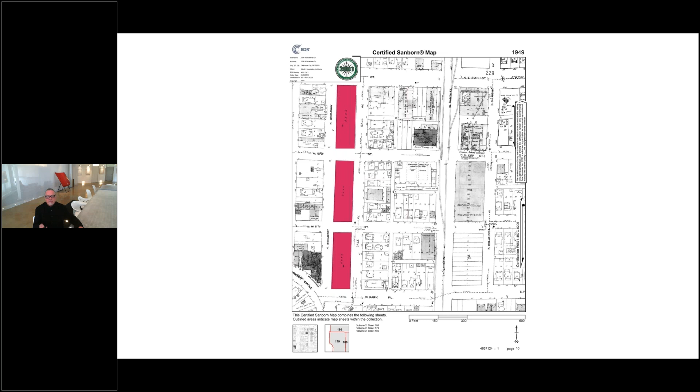One of the things that's important about this context is what goes on around it. There's a railroad on the east side, a streetcar on the west, and then this little misfire from a survey point of view.

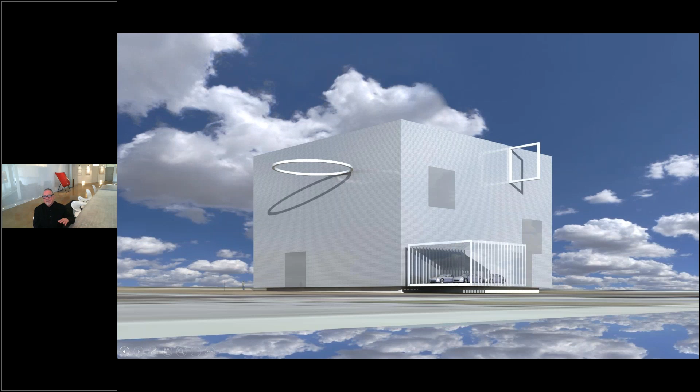In this particular instance, we're contemplating a glossy or glazed brick, white brick, that would be very simple and straightforward, and then artistic shapes that would then, in essence, cast its own shadow and therefore be moving or a building in motion and changing, which will be important as we go through the process. But you can see that it has a curiosity about it.

Same thing here, how the windows might be placed. And then trying to get less and less. Can you get less and less and more impact by the shapes, the shadows, and those kinds of things that really make you understand what goes on in this building?

Just to kind of give you a little bit of an idea of the kinds of work that we do and the things that we're thinking about, it has to do with place. How do you place this building in a particular location?

Well, the two elements on the upper right-hand corner casting its shadow illustrate the fact that the address of this building is at 11 Northeast 11th. And it was a way to artistically interpret that address. To the right was an outdoor space floating above a porte-cochere.

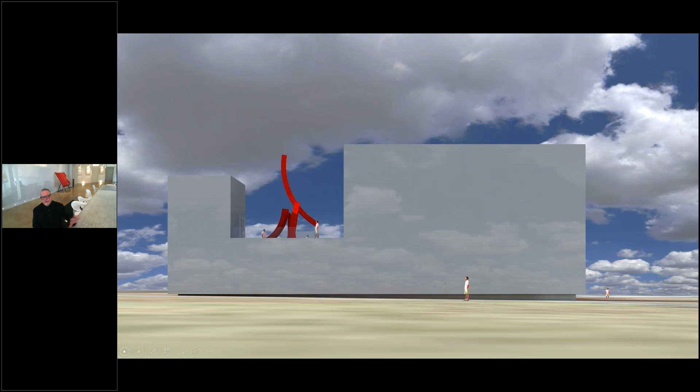Then we did versions comparing or completing an addition at the outset of the building, which would include not a second building, which we ended up doing, but an extension of the main building. The main building block is the large one to the right. The small one to the left is actually where the makerspace began at the earliest phases.

We looked at stacking the program, again, this outdoor deck. We particularly like the lady floating in the middle of the photograph. That was, of course, planned. And then you see coming around to see another form being created as a result of program.

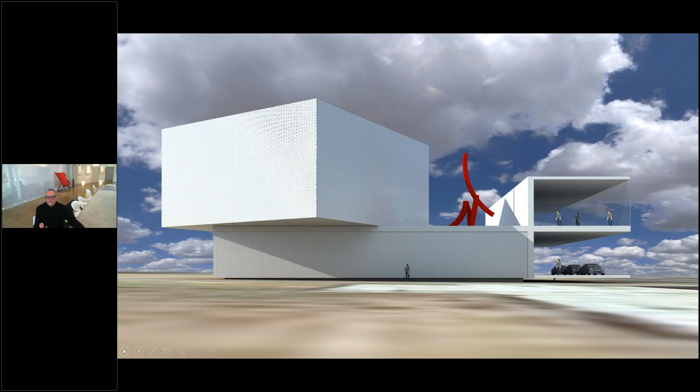And then we began to look at the fact that, well, what if we can't afford the idea of a multi-story building? What if it has to be flat? We had 4.8 acres. We could do a flat building, and so we began to illustrate that as well. Certainly there would be a cost benefit to this.

This is basically a big plinth floating above the ground, just like the two people are there on this photo, which I'm just noticing for the first time, and I'm just appalled and embarrassed.

This gives you a sense of the view that the people in the community would see as they approach the building. Parking would be on the right. We live in a place where parking is very important in this part of the world.

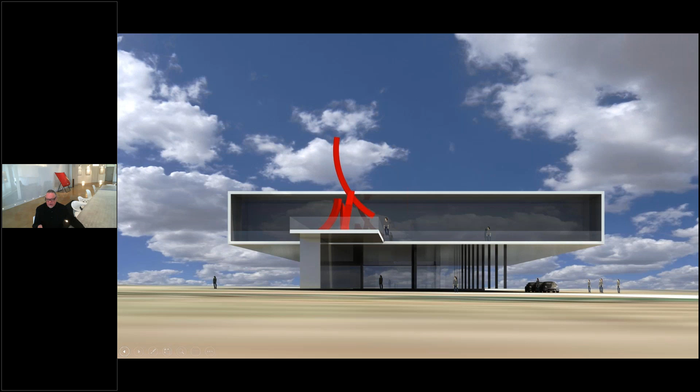This was intended to be the floating building because we had the opportunity and desire to have children protected from the hot sun and wind. By raising the building off the ground, it seemed to make lots of sense. It also provided protected space for exhibitions to be shown in all types of weather.

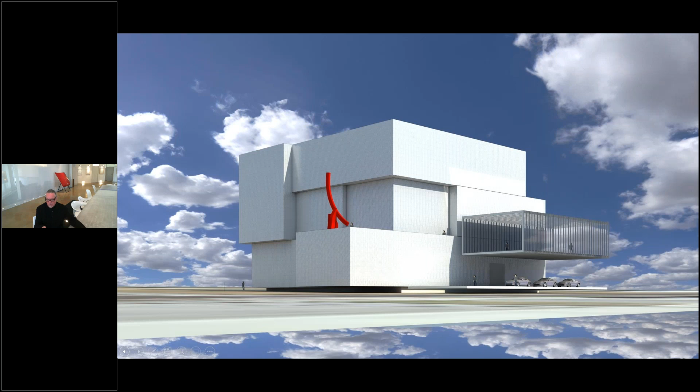Simple, again, another simple exercise in volumetric forms, stacking together and creating indoor and outdoor spaces functioning together. Again, you see the volumetric developments. On the right, you see this notion about a protected outdoor space and a porte-cochere that's a result of it.

So it began to continue on to this notion of site concepts, and I'm going to start by telling you that I've been working in sketchbooks virtually all of my life. I've just finished my 50th, number 50, and I've started my 51st sketchbook. They're 210 pages each. It takes anywhere from 60 days to 12 months to complete it, depending on projects we have and how inspired I feel at the particular time.

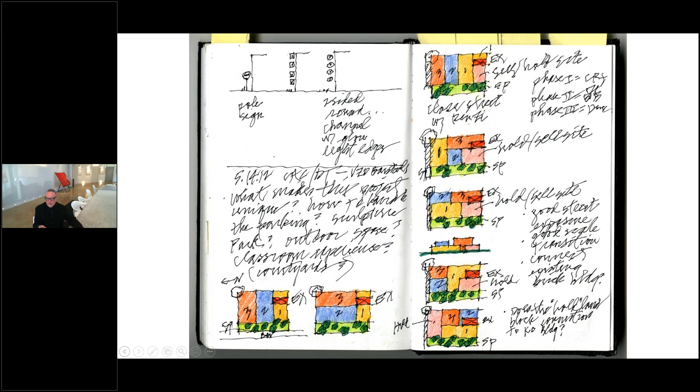So this is an exercise of going through trying to do site-related experimentation about where functions go, how the 1, 2, and 3, which are the functions of how the building might be added onto over a period of time. On the right-hand side, for some reason, I either ran out of paper or did something, and I used a napkin.

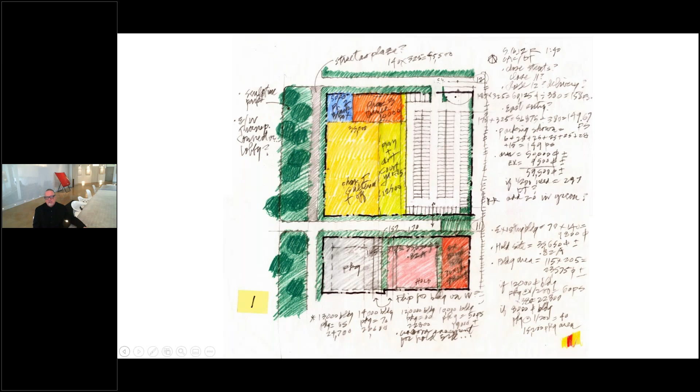And then that group of very rough drawings—I will tell you that all of my drawings in my sketchbook, I basically call my ugly drawings. And people say, well, why aren't they beautiful? And I say, because I don't do beautiful drawings. These are really drawings that identify possibilities and opportunities and design things. You'll notice there's 50% words and 50% images, if you will. So this was number 1 out of 16 site studies that I did in an effort to try to determine what the best solution was.

I ended up on number 16, and you'll notice down at the bottom, the yellow blocks surround a courtyard. This was an early possibility on how we would protect children being within this courtyard from disappearing or wandering off from the institution, and it was one very important step going forward.

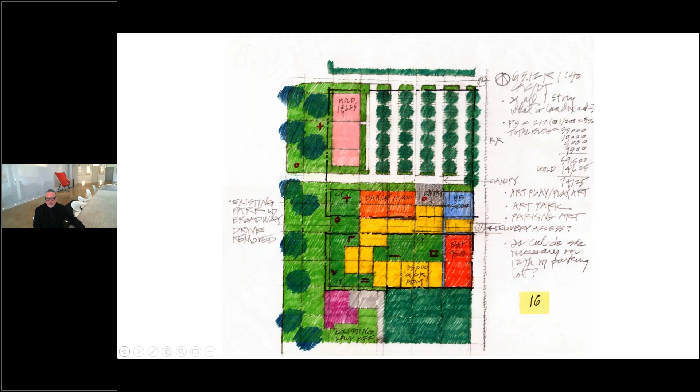Again, I said earlier that we live in the land of cars in Oklahoma City. Oklahoma City is 620 square miles. Every place is 30 minutes away, and so that's just a part of our lifestyle.

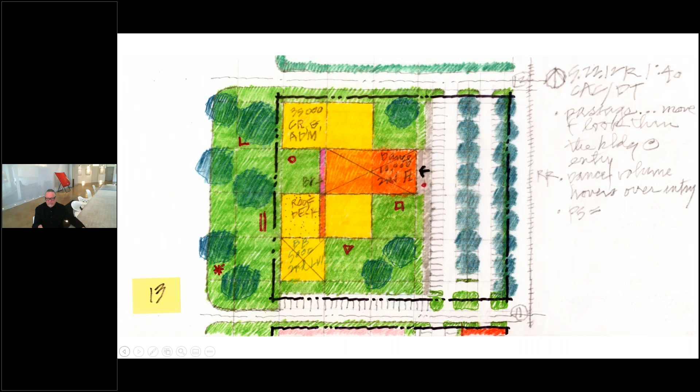You can see that I did a second round of 13 variations on the site concepts. Ended up isolating the building itself. The parking ends up being on the east, which is the right. The railroad track, and the track you saw earlier with the big railroad, the big diesel train, is that view. On the left, I have actually taken out the road that separates Oklahoma Contemporary from the park. You'll see it come back in a moment, but this was really focusing on that.

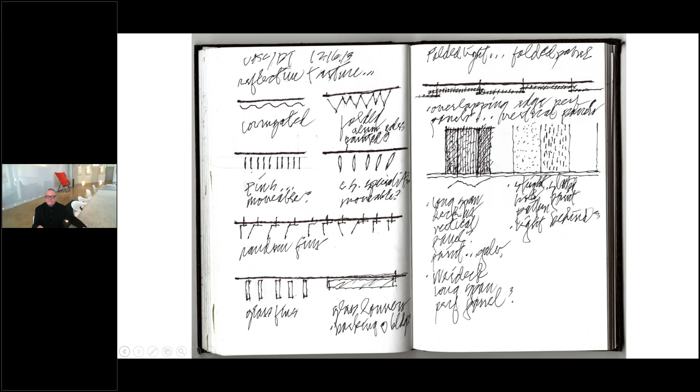And then I continued on with this notion of what would it be like and how would you construct this? How would you put it together? How would you make these panels and literally attach them to the exterior building?

We have a wonderful stair called the ceremonial stair that you'll see in a moment. I felt like this really needed to be an experience, and so we took a fire stair and converted it to an accessible stair using special fire doors that automatically close when there's a fire, but during the daytime they're open all the time. And so the stair becomes this place for artwork.

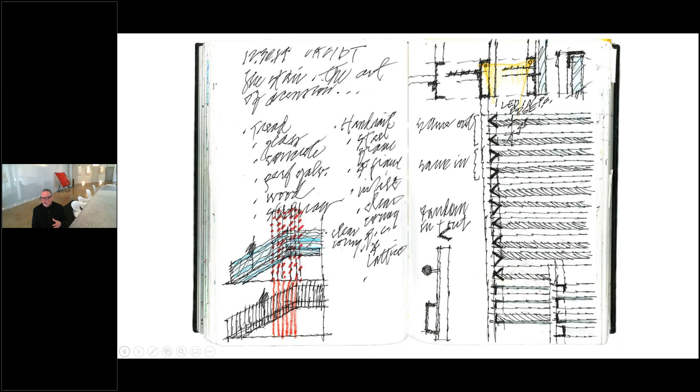There's going to be opera created and sung in the stair that you'll see in just a moment. It was also important that it was a place where great conversation might go on between artists, students, or anybody there to see something new.

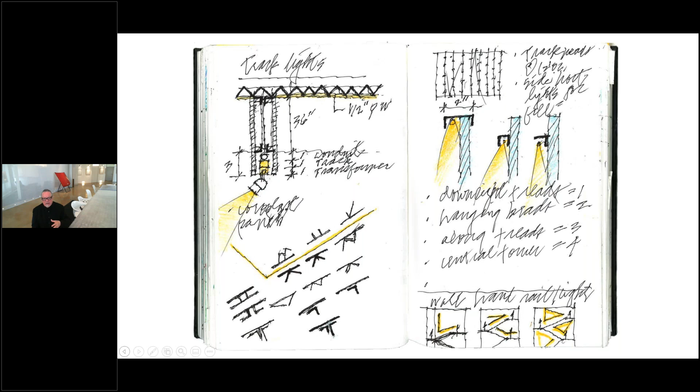So you're continuing to see this development. The upper right-hand says, how do you fold light? I'm really trying to ask myself these questions as the skin continues to develop. Everything from the lights on the stair on the right are made from folded channels. The folded elements on the left in the lower part are about how a column might be enclosed using folded metal panels.

And then finally you get to basically 2014. This was the first real appreciation for the folded form of the building, literally going all the way around and creating this folded form, ultimately folding light.

On the left-hand side, the element sticking out ends up being the lantern that you'll see, classrooms on the left, the entrance on the right, the blue rectangle is the elevator, the loading dock and so forth on the north side. The north side is where we end up with the elevated deck that overlooks the great lawn you'll see in just a moment.

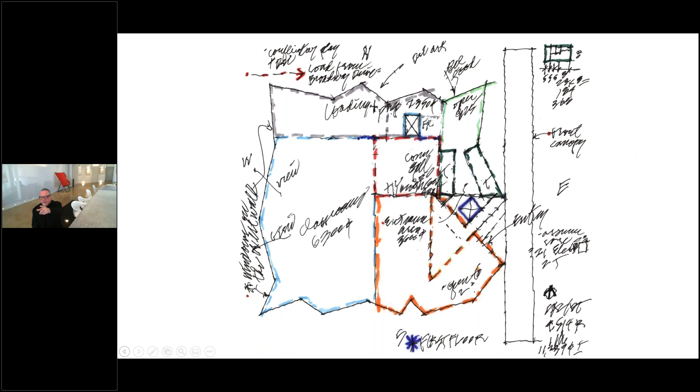One interesting thing on the right-hand side, it says entry, and there's an E over there, which means east. That linear element was really the front canopy, and the canopy moved completely as the project evolved.

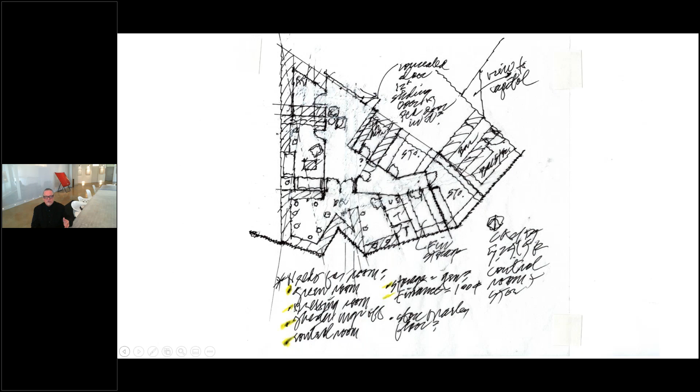So we then take that next step, which is to make spaces, usable spaces, with simple sketches. This is the green room areas. It includes toilets, offices, storage areas, and so forth, and it is continuing to become, we're really starting to become a building.

The Architectural Committee, which I am deeply indebted to over a period of time, included this group: myself, James Pickle, Chris Casillas in the middle, he is our chairman, and the director at the time, Liz Eichmann. Anyway, all of this group are really a part of making this building come together.

We built 3 full-size mock-ups on a space next to our building in downtown Oklahoma City. The left one ends up being a corrugated shingle made in Nebraska. The center one is folding light that was chosen, that's why we're all standing in front of it. The right one is a variation of that, but done in white. This one was chosen on this day and agreed to go forward.

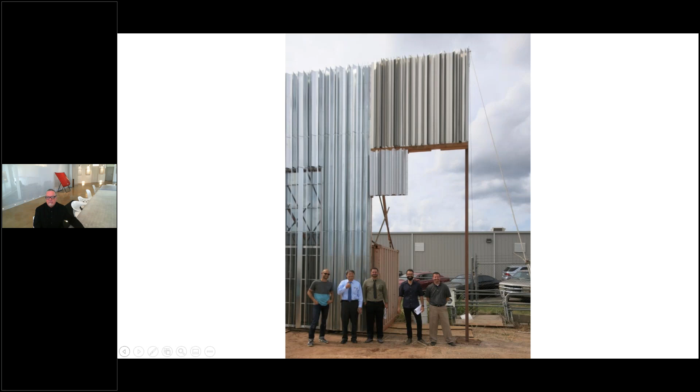What also happened is that we went to the contractor's yard, Matt Thomas. The fellow in the blue shirt, that's Bill Yen from my office, but the right-hand fellow is Josh Livingston, and Josh and his company were responsible for fabricating the fins for us, a very important moment in the history of the building.

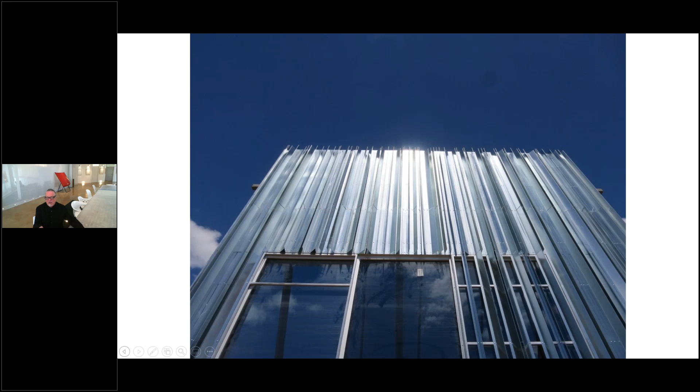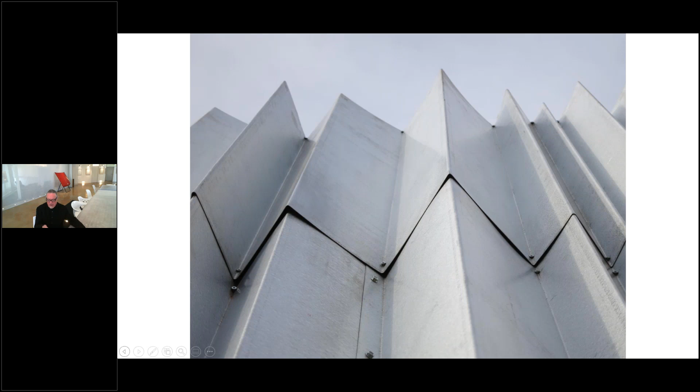As you can see, it started out having corrugated metal and screw-attached elements, and we got smarter as we went through this, finally ending up doing it as an extruded aluminum fin that you'll see in a moment. This was a mock-up, kind of reminds me of my dad's farm equipment, but anyway, it was a very important start for us going forward.

So I'd like to jump into construction at this particular moment and show what began to happen at this time.

For 20 years I have been photographing gloves. I first saw construction gloves falling on the ground, or falling on the floor inside a building under construction, and I was fascinated by it because architecture wouldn't exist without construction people and craftsmen, people who can do things a whole lot better than I can. These became fascinating to me, and I've done about 5,000 photographs of gloves done by workmen, my homage to their work itself.

So this really starts the construction process. This is the site as we begin to do excavation work. The job site sign is on the right.

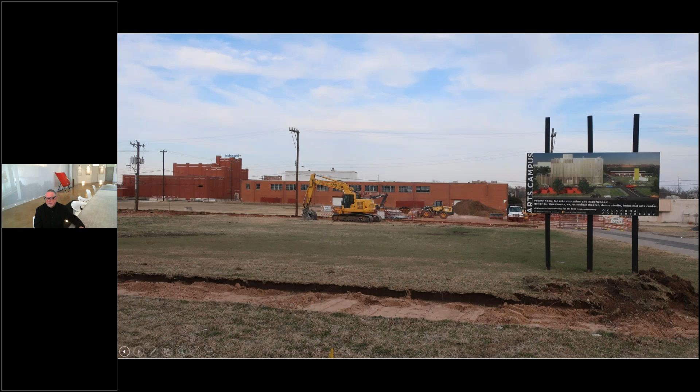We continue on. This is not my burial ground, I will promise you that. This is actually a location for the box that would go in the ground, containing the important drawings and history, a time capsule if you will, that will be opened up in 100 years, and I'll be there for that. So if you're wanting to come to Oklahoma City, I look forward to seeing you then.

Oklahoma is also known for the bombing in 1995. It's known for the Dust Bowl. It's known for the oil and gas industry being a seesaw. It is known for lots of things. Some of them are really good, some of them are not so good.

We wanted to find a way to commemorate or say something about Oklahoma City that was really powerful and very positive, so we are celebrating the quality of the light and the color of the skies in Oklahoma. This building is inspired by that very thing. Walking around on the site one day, as you can see, it's under construction.

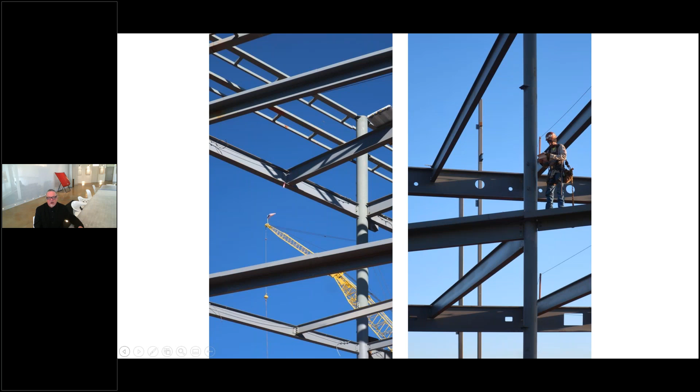The steel obviously starts to go up. I'm really proud of Bill Yin for spotting and creating all of these locations you see perforated in these giant wide flanges that allow devices like fire protection and so forth to go through without doing an up and down around the beams.

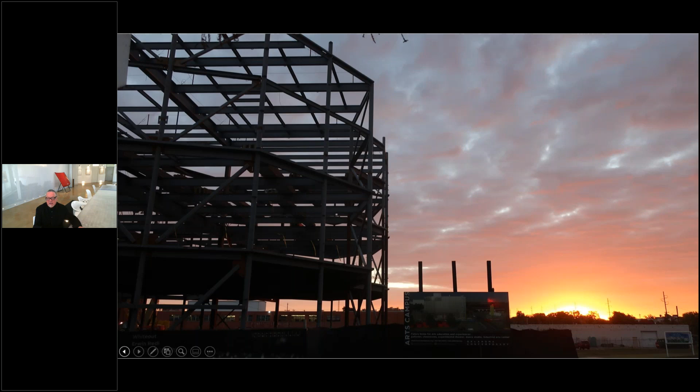This again captures the notion of the east, or the sunrise coming up. The sun is just below, just beyond where the sign on the building is, to the east. But again, it's sort of a moment to imagine what would ultimately be coming.

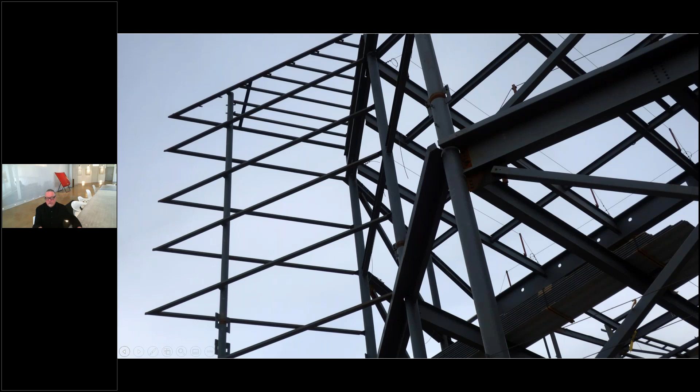Wonderful steel work. I love working with iron workers and watching them do lots of things that I can't do. At the topping out ceremony, it was a gray day, very windy, like most days are, and they were able to tie the tree to the top so it wouldn't blow off.

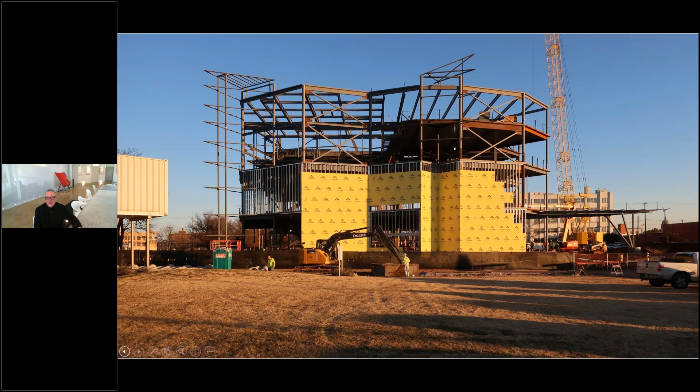The building continued, obviously under construction, with Dens Glass. This is a 12-inch thick wall because we wanted something very energy efficient and sustainable, so we've got lots of air in there, and insulation certainly. It gave us an opportunity to do a very, very responsible building along the way.

This is our first two large sections of mock-up to go up on the building, of the fins themselves. On the left was the first set, on the right is the second set, and the short version is the handrail, which you'll see in a moment.

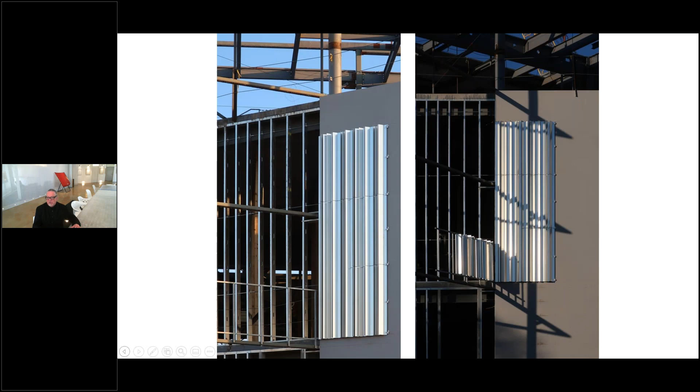What also captured my attention here was the whole idea of, in essence, the lantern casting its shadow over the random fins, and what an incredible shadow it created, and how the light, dark, shade, shadow, and reflection all began to happen at one time.

As it went further, it became clearer and clearer. In fact, I was so happy that one of the fellows putting up the aluminum came to me one day with this incredible look on his face, great joy, and he said, 'Gosh, Rand, it's working.' I stopped for a moment and thought, thank goodness it's working. I would have been run out of town if it wasn't, but it really did work, and you're going to see the results of that in a moment.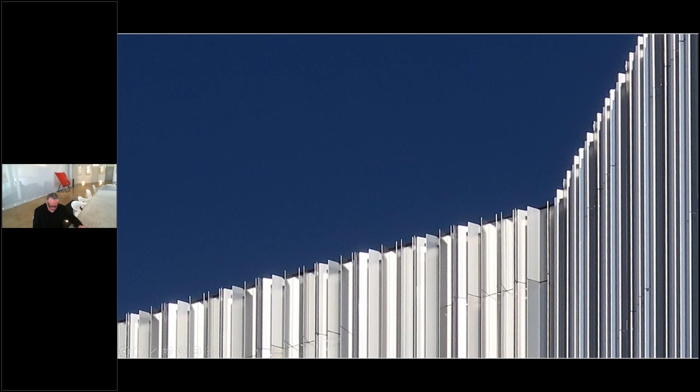At the very top of the roof edge, I'm sorry this slide is a little soft, we took the fins all the way up. We did not cover it with cap flashing because we wanted this notion to be a building that was continuing, or reaching for the sky along the way.

The lights start to go into the lantern. The lantern is a recognition for a very important donor along the way, as you see this, you're looking to the east.

What's particularly important, not only in its poetic name, Folding Light, but the whole idea that there is something driving this building. The whole idea was that the building needed to do three things. It needed to embrace its place. It's something I believe in philosophically. It's my home, and it's a very important thing. So embrace the idea of place.

This is Oklahoma. How can we put this building in this place? This building, I can tell you, could not belong anywhere else. It belongs in Oklahoma City.

Its purpose was to be an arts education facility. Its intention is to teach children and adults about the arts and how important they can be in their impact on all of us as we go through life, and those things we acquire, understand and appreciate that are beautiful along the way. The poetics is simply another word for the architecture. Combining place, purpose, and poetics is what really makes Folding Light what it is today.

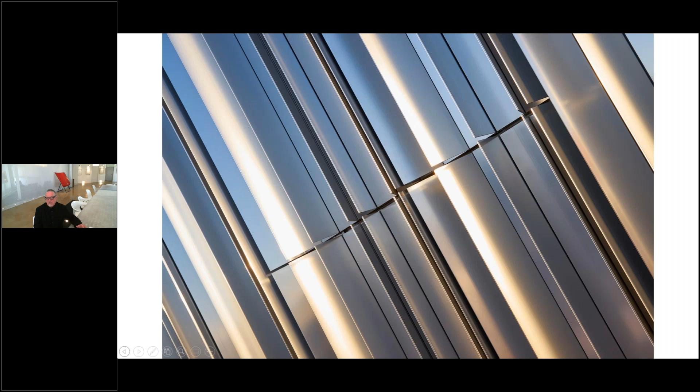Virtually every project that I do, there is some word painting, which is my way of saying a description about the building before the building ever happens. This is a wish or a dream come true. As the sun begins to rise, this is what the fins begin to do. They begin to glow and glisten and change into shade, shadow, and reflection that you begin to see here. This is what's about to happen.

It's in this particular instance, obviously a wonderful early morning Oklahoma sky that shows the orange clouds. As the clouds change and the wind blows the clouds through and the color of the sky continues to change, we're actually looking at the front door towards the east.

Three of the four columns support the porte cochere. There's one column that is detached. This group of columns is symbolic of the ancient tall grass prairies that began in Canada and came all the way to Oklahoma. In fact, it was called the Iron Forest. The people that pioneered Oklahoma said it was near impossible to get through the Iron Forest as they continued to look into living and being in Oklahoma along the way.

So what is the fourth one? Why doesn't it touch? I've had people say, Rand, you made a big mistake, something's wrong, the structural guy missed it, the welder missed it. Well, that particular element represents the fact that an artist's view sometimes goes beyond that of being attached. That in fact, it is thinking ahead. It is reaching ahead. It is trying to be more than just that which is in front of you.

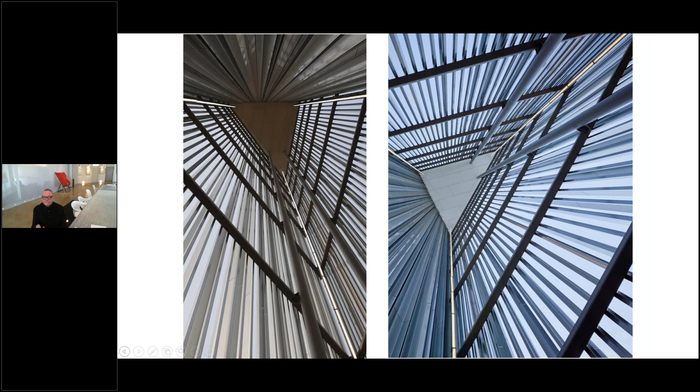The north side of the building in the wintertime is in the shade. You don't get an opportunity to have sun on the north side. It basically is a 180-degree version at our point in the world, and you're seeing a horizontal across there. That's the handrail. The 2 big square windows are the dance studio that you'll see in a moment.

The 50% open fins at the roof are there to allow air circulation around the mechanical systems. We believe we've done some 35 arts-related institutions and buildings, and I like this notion that you're going to tell the truth. The truth is there's air conditioning units on the roof, and so the 50% fins let you see or peek through it. It's not always visible, but sometimes it is and sometimes it's not.

I took this a week ago, and I wanted you to see what's going on in the spring. Here we are about to be June, and this incredible change is going on, this golden color and almost cantaloupe color and gray and powder blue begins to happen, and the building completely changes. Up close, the fins are seen as this textural element, one layer on top of another.

The outdoor space has to have protection, to provide opportunities to enclose and protect our young children outside, throwing a frisbee or creating artwork, or if we're having a concert. We wanted to do a gate for that protection. We didn't want it to be opaque, and certainly didn't want it to be anything but an artistic element like the rest of the building. So we did this wonderful 20-foot wide section from the pivot point so that the gate itself rotates. It's a pivoting gate. On the right it shows you what the structure looks like inside of it using perforated metal.

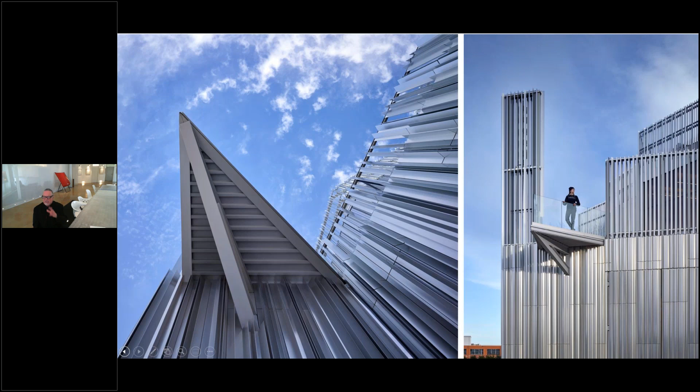This is one of the Romeo and Juliet balconies. Mackenzie, our photographer's assistant, went up and posed for us, which is really great. You can see the tower, and on the left is the underneath part of the balcony as well. You're 18 feet off the ground. The views are incredible. There's no high rises nearby.

It's a wonderful experience. Very quickly, this gives you a sense of the floor plans, what they actually look like. This level over on the right is the main entry.

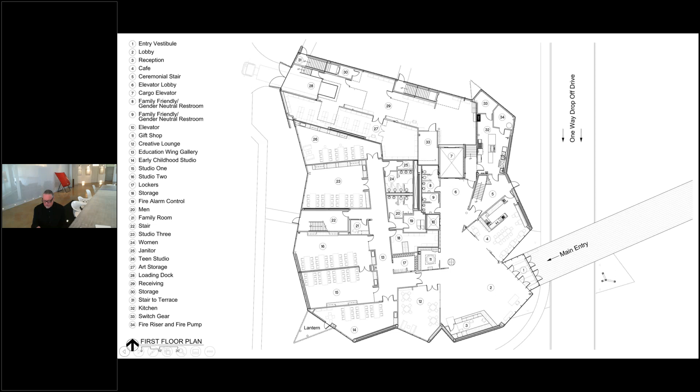Number 2, which is just inside of it, is the lobby. Over on the left is the classrooms going from pre-K to teens. The center section is obviously core with children's toilets, public toilets. The north part, or the top of the plan, is basically the storage areas and where art is taken out of crates and that sort of thing. On the right-hand side, upper right-hand side, is the cafe kitchen. On the lower right-hand side is the cafe itself, and the space for the shop is in the middle of the building.

So you come in the front door. This is our tour beginning to the interior of the space, and you see that the southwest area of the building is glass, and so we did the 50% open fins there to control that sun.

You check in at the counter. You have these two screens up on the wall that happen to be the logo for the institution, but there's something different here, and that is this white on white panel. It's a very important panel, and you'll see why as we go through it.

Here's Mackenzie sitting in the lobby, with wonderful light coming through in the southeast, which is a cool time of the day. This is a view looking back towards the reception desk, and again you see the screens themselves, and then you see this panel again.

As we began to realize that this was an arts institution—not a restaurant, not a gift shop, not a retail environment—we had some very lively discussions with our client's representative. We wanted something on the ground level that would have art in it. I mean, it's an art institution—how do you know it's an art institution if you don't have a piece of art? She wanted to basically not have any art, and I just said this is ridiculous, we can't do that. So the compromise was they did put a piece of artwork, which you'll see in a moment. But more importantly, this really represents the notion that we are living in the 21st century.

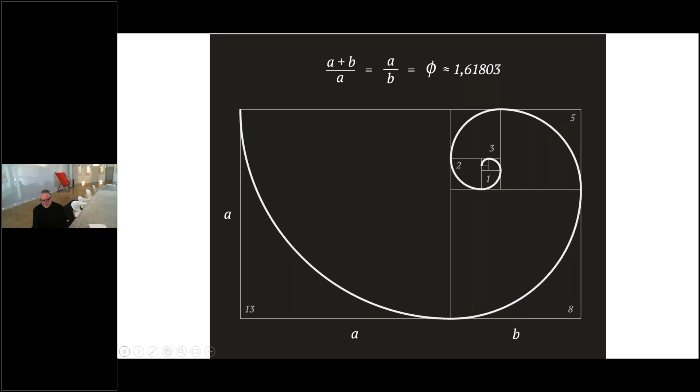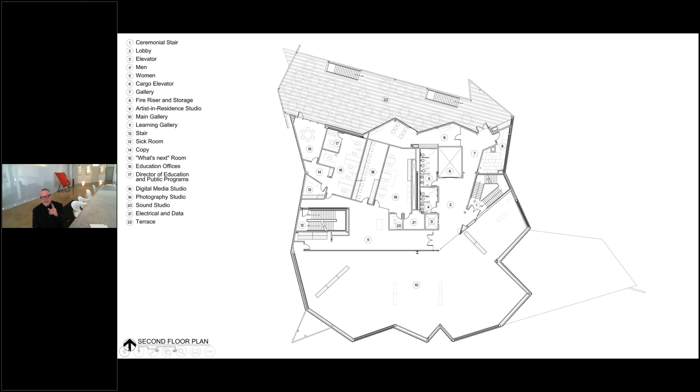Instead of just throwing away an opportunity like most fire stairs are, we have two. The left one is not quite as cool as the right one, but the right one really speaks clearly about the opportunity to grow and change and climb and reach for something bigger and better. This space is created as an homage to M.C. Escher, as if you were climbing in this forever winding stair going up.

Once you get to that second floor level, you come out of the elevator into a small gallery, which is where Shadow on the Glare is an installation going on. The artwork, as you can see, meanders down adjacent corridors. There's art all around you in different scales.

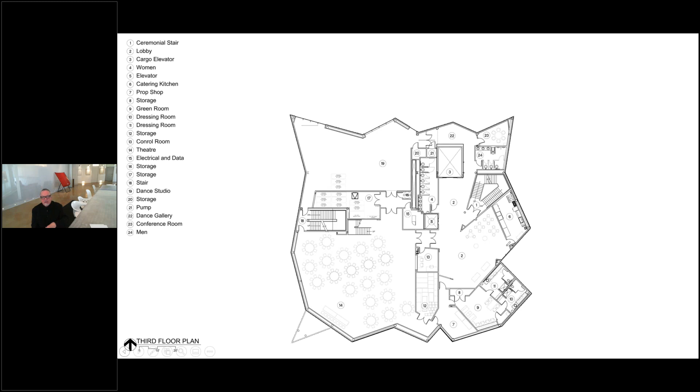Cocktails, music, and that sort of thing is in space number 2. To the lower right is the space for actors, meaning the green room and that kind of thing. Upper left is dance space. Lower left is the black box theater.

Or, if your favorite color was violet, we could show your favorite color as you come up and move into the space itself. So it's there to celebrate time and events. You come off the elevator, you come to this space. This is the pre-function space I was telling you about. And then you walk into the theater, and you don't expect a 2-story black box theater on the 3rd floor.

One of the things we did is that we wanted to create an experiential space. This is not just a theater, but because of the institution's goals, it had to be a place for the Rotary to meet, a place for a special anniversary, a place for a special party of some kind. So we needed both a ceremonial light fixture as well as something called house lights.

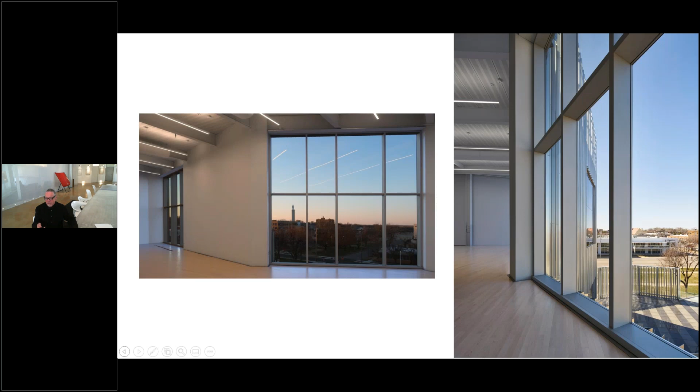What happens is as the sun goes down, the room actually changes color. You're seeing that happening on the left. On the right, you're seeing off to the western horizon.

The fourth floor, which is the top floor, number 11 in the lower right-hand corner is the collaborative space where the staff works. In the upper corner is the same thing. You're seeing the ceremonial stair, the triangular stair. Over in the lower left is the Toyota Theater. It's open because that's the second floor, and there are 67 chairs that go around it for specialty opportunities for mezzanine viewing, if you will.

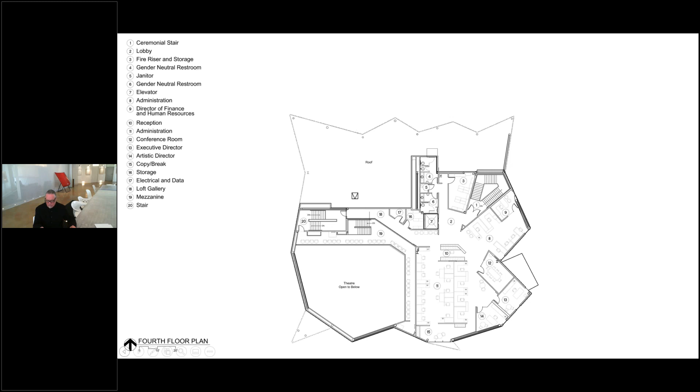Now we're about to go down.

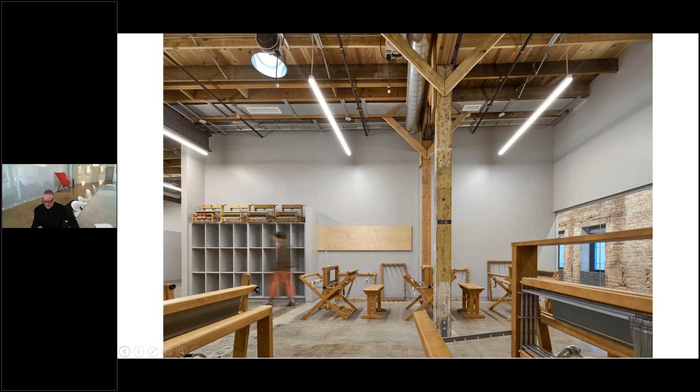A particularly important thing we did here is that in appreciation for the weaving studio, the brick building outside the front door, right next to the weaving studio, is made of woven bricks. And I couldn't resist the woven bricks with snow on their edges.

Scott McDonald, a photographer, said, 'Rand, go down there and clean the table.' So I'm the guy in the middle cleaning, and Mackenzie's on the left, and the potter is further on the left. This shows you the lead doors that were used to load and unload off of the train, which is just beyond those big windows.

Outside on this outdoor deck, you see the two custom-made gas-fired kilns. The amount of material that goes in and out of this is so heavy that it has to be moved on a railroad track kind of device.

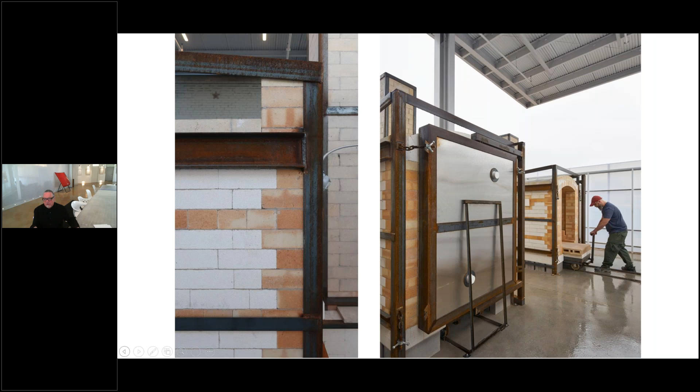In the end, I hope everybody in the audience believes the same thing I do, and that is that architecture is really a million details. It's not just a big building—it's really a big building made of a million smaller pieces.